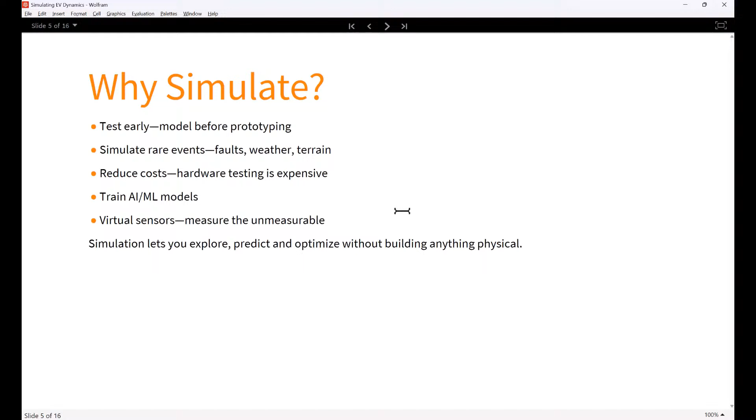With that in mind, let's jump into our EV model and look at the simulation results. Let's open up the model in System Modeler.

For those of you who are new to it, this is the System Modeler's modeling interface. You can build models visually using drag and drop from the built-in Modelica library. This library includes hundreds of components from domains like electrical, mechanical, and thermal systems.

Throughout this presentation, we will look at several of these components more closely and see how they connect to simulate electric vehicle behavior.

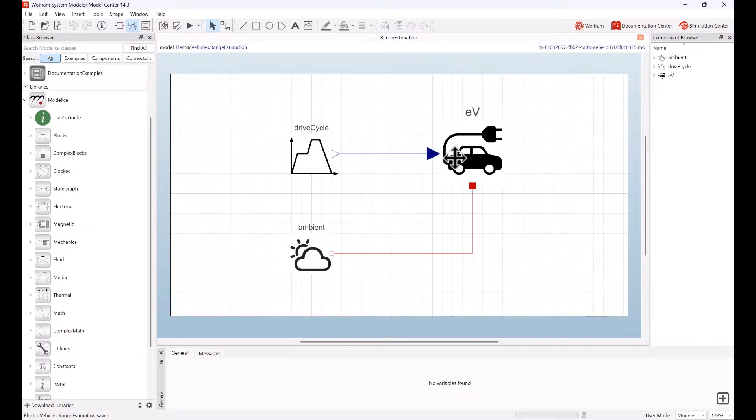Here you can see the top level EV model. The EV is connected to a velocity profile representing how the vehicle moves, and to an ambient component with a temperature input. These components are hierarchically structured, meaning each block contains subcomponents, which you can explore by double-clicking.

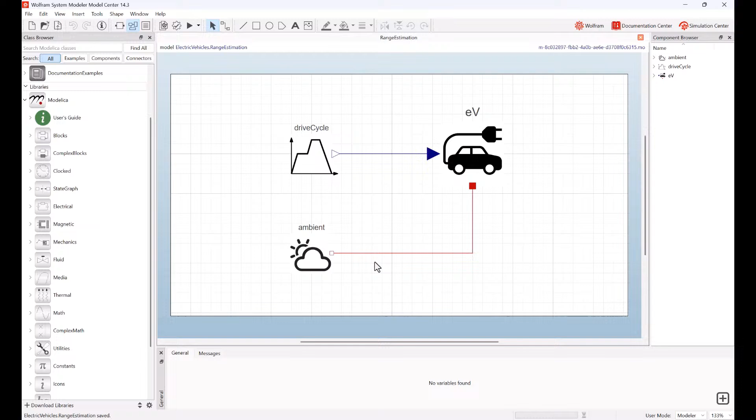Let's zoom in on the EV block. Inside, we see a detailed view of the EV architecture: motor, gearbox, controller, inverter, battery, and thermal systems.

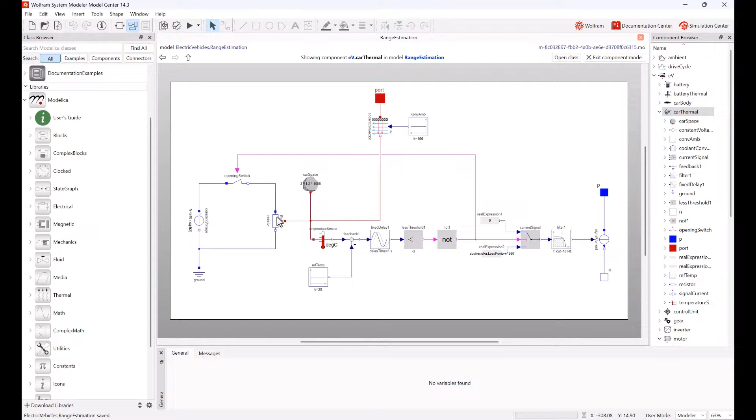You can continue drilling down into any component and even switch to text view to inspect or modify the underlying equations.

For example, in a resistor block, you will see Ohm's law implemented explicitly with voltage and current relationships.

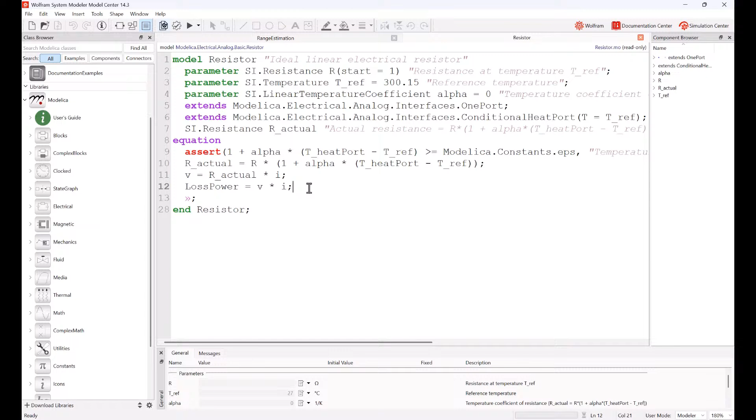You are not limited to built-in components either. You can define your own custom models from first principles or experimental data.

Let's return to the top level and now explore each of the major components one by one. Let's now walk through the major components of the EV model.

We start with a battery, which acts as the energy source. In our case, it provides a DC voltage of around 350 volts. That DC voltage needs to be converted into AC before it can power the AC motor. This is done by the inverter, which sits between the battery and the motor.

The motor produces torque, but at a very high rotational speed, often around 20,000 rpm. To match the wheel speed, this needs to be reduced, typically down to about 2000 rpm, and this is done using a fixed gear reduction stage.

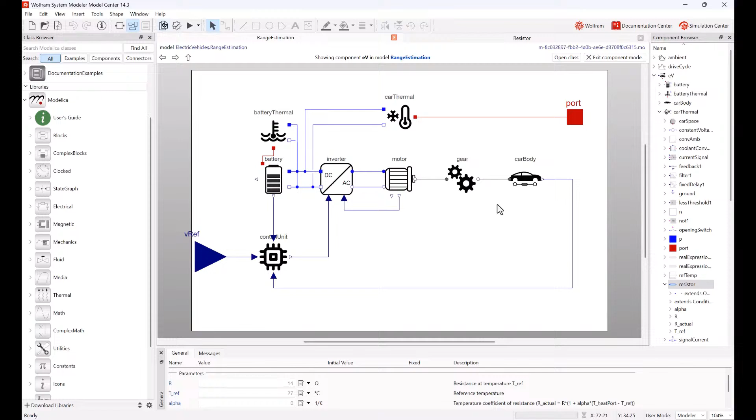From there, power flows into the car body model. This component accounts for all the external forces acting on the vehicle, including aerodynamic drag, rolling resistance, and gradient forces.

There is also a control unit which monitors vehicle speed and regulates current supplied to the motor to achieve the desired driving profile.

Finally, we include thermal components, one for the battery and one for the car, to simulate how heat builds up or is dissipated during operation.

Of course, in a full vehicle model, there are many other components such as DC-DC converters, auxiliary batteries, and accessory systems. But for this presentation, we will focus on the core powertrain and thermal systems.

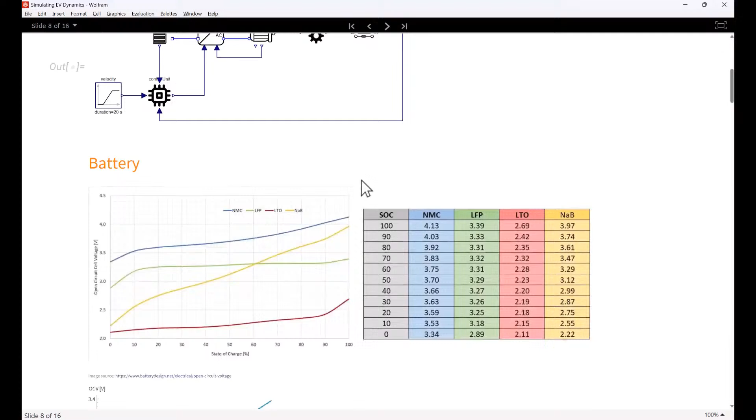Let's take a closer look at the battery component, which plays a central role in EV performance. There are different types of battery chemistries used today, such as LFP, NMC, and LTO. Each chemistry has its own characteristics, and one of the most important is the open circuit voltage versus state of charge, or SOC, curve. In the chart shown here, you can see how the voltage changes as the battery discharges.

NMC cells deliver the highest voltage, around 4 volts at full charge. LTO cells deliver lower voltage, around 2.5 volts. LFP, though not the highest in voltage, has a nearly flat OCV curve, which means the open circuit voltage stays stable across a wide SOC range. This stability is one reason why LFP has become widely adopted in many EV platforms.

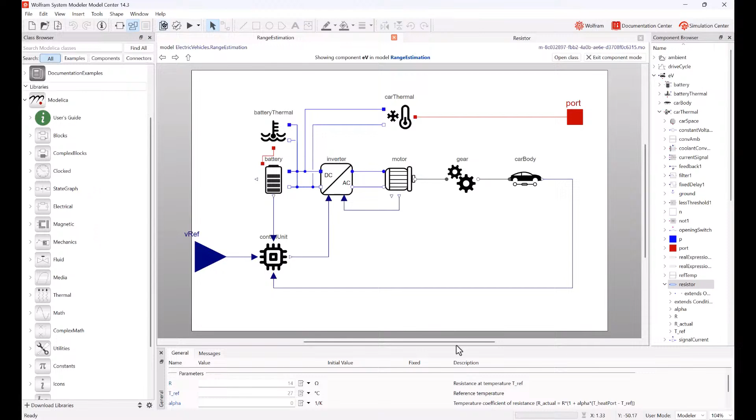Now, this data is for a single cell. In a real battery pack, however, cells are arranged in series and parallel to reach the desired voltage and current capacities. Let's get back to System Modeler. In our battery model, we can define these parameters: number of cells in series to get the total voltage, and number of cells in parallel to get the total current capability.

For the cells, we can also provide the internal resistance, nominal charge, and define the OCV curve itself.

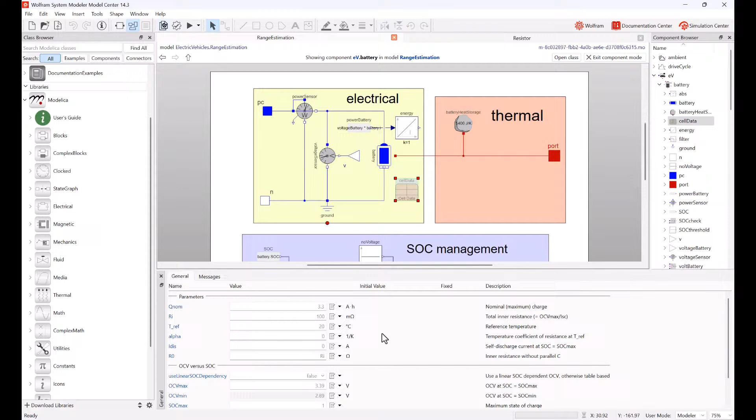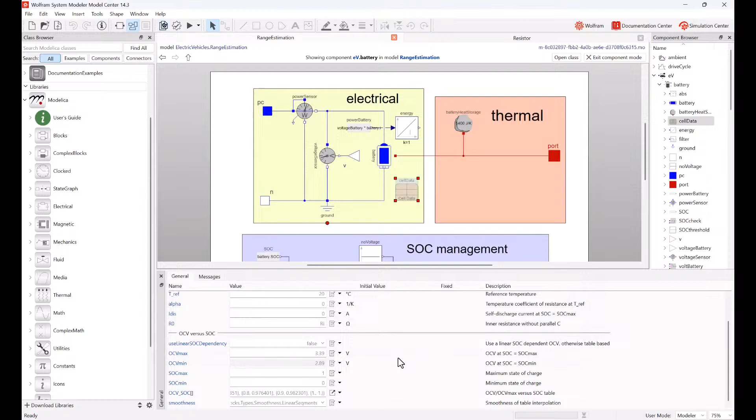The model also includes the electrical dynamics of the cell. Internally, each cell is modeled with a primary series resistance and one or more RC circuits to represent the transient behaviors like hysteresis.

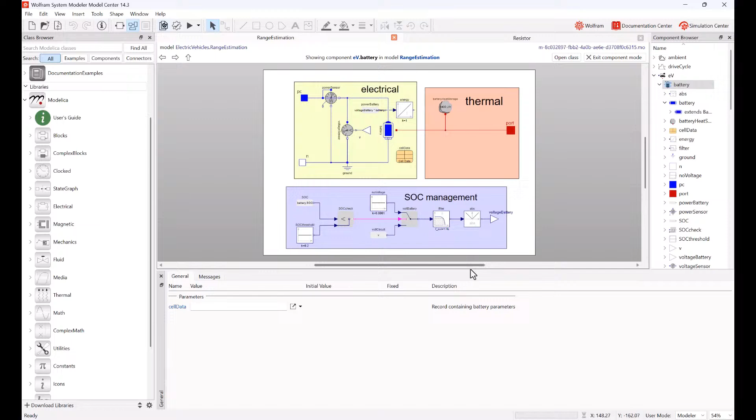There is also a heat port built into the battery model. This port gathers all the thermal losses caused by the internal resistances. The heat is passed on to a thermal capacitor, which is a lumped model representing thermal mass. Its capacity is calculated using the formula mass times specific heat capacity.

This thermal capacitor can be connected to a cooling or heating circuit, for example a refrigerant loop, to simulate active thermal management.

Lastly, a note on connections in System Modeler. You will see red and blue lines connecting components. These aren't just input and output signal wires. They represent energy carrying domains like electrical and thermal connections.

So this approach ensures that the conservation laws like energy and mass balance are automatically enforced and that connections stay consistent within the physical domains. You cannot directly connect an electrical wire to a thermal capacitor.

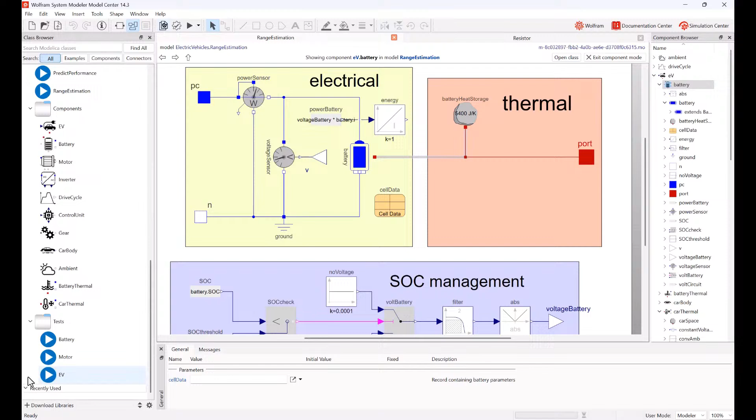Let's now simulate a simple battery test scenario. In this model, we draw a constant current of 100 amperes from the battery pack, which is a typical discharge profile for a sustained load.

As expected, you can see the voltage output starting at around 370 volts and gradually decreasing over time. This follows the OCV versus SOC curve we discussed earlier. As the state of charge drops, so does the voltage.

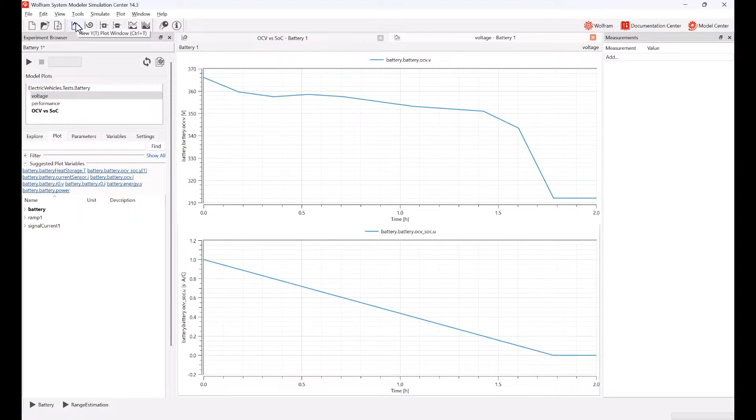Of course, in a real system, thermal management would prevent this. But this test shows why modeling thermal behavior is essential and why cooling systems are not optional in high power applications like EVs. Without proper heat extraction, the battery can quickly enter unsafe operating conditions, affecting not just efficiency but also safety and lifespan.

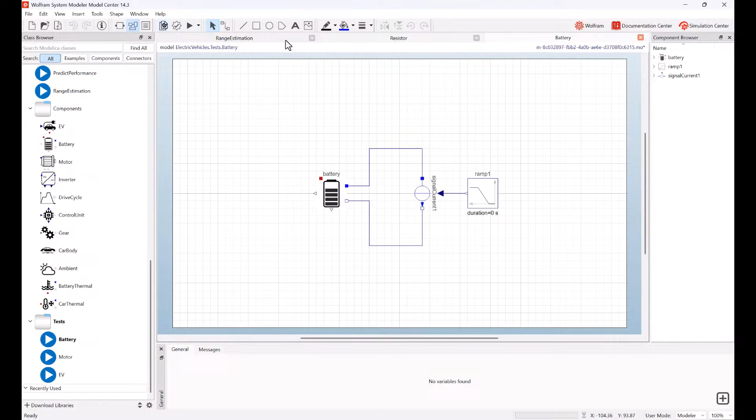Electric vehicles can use a variety of motor types, but the most commonly used in modern designs is a three-phase AC permanent magnet synchronous motor, or PMSM. These motors are popular due to their high efficiency, power density, and good performance over a wide speed range.

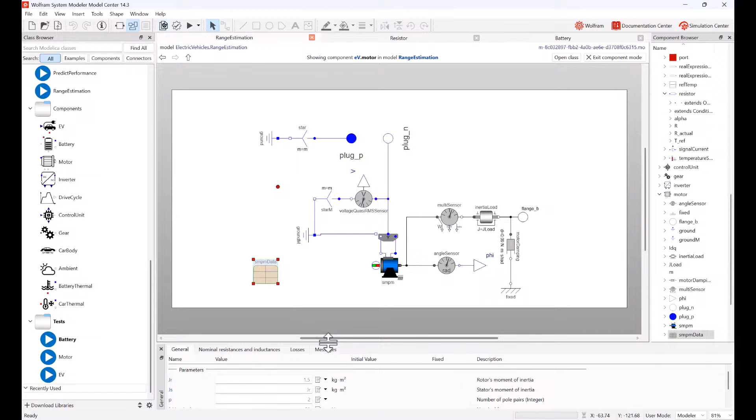In our model, I have used the three-phase permanent magnet synchronous machine component from the Modelica library. This component is based on physical equations and allows you to specify key parameters such as stator resistances and inductances, permanent magnet flux linkages, torque constants, and mechanical losses.

One useful feature of this model is that it is bidirectional. It can operate both as a motor and a generator depending on the power flow direction. That is essential for simulating regenerative braking scenarios, where the motor recovers energy and sends it back to the battery.

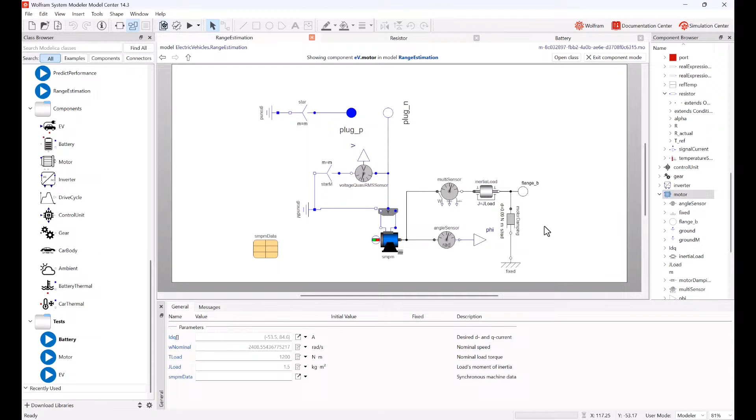On the mechanical side, the motor is connected to a shaft model which includes a rotational inertia to simulate the mass of the rotating components, and a damping element to represent friction at the shaft or bearing level. Now let's simulate a simple driving scenario.

The vehicle accelerates from 20 to 100 km per hour. As expected, the motor power and torque increase during acceleration. Once the target speed is reached and the vehicle cruises, the required power and torque drop and stabilize. This reflects typical EV behavior, where high torque is required at low speeds for acceleration and lower power is needed once cruising.

Now let's take a look at the car body component, which brings together the mechanical forces acting on the vehicle. This component accounts for four main forces: traction force, generated at the wheels by the motor via the drivetrain; gravitational force, due to the weight of the vehicle when it moves along a slope or gradient; rolling resistance, caused by the deformation from friction between the tires and the road surface; and aerodynamic drag, the resistance from air which increases with speed.

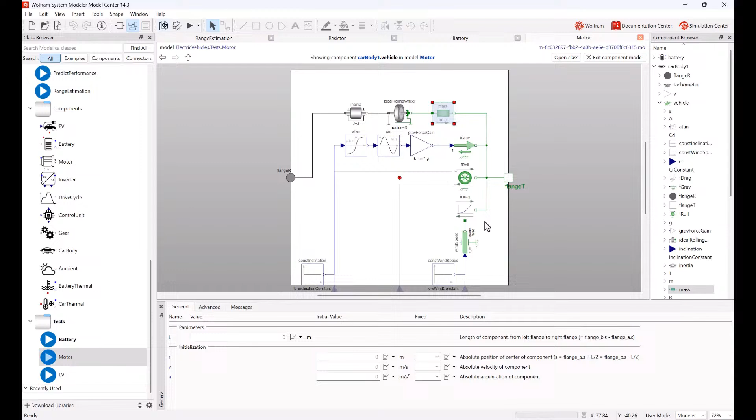In our test simulation, the vehicle moves over a constant incline while accelerating from 0 to 100 km per hour. Let's simulate and see the results. The rolling resistance and gradient force remain constant since they depend on vehicle weight and slope. However, aerodynamic drag increases quadratically with velocity, meaning it becomes a dominant factor at higher speeds.

To move the vehicle, the traction force generated by the motor must overcome all of these resistance forces. In addition, it must supply extra force for acceleration, especially in the early phase of motion. This component gives us insight into how external forces interact with the drivetrain and how energy demand changes as the vehicle moves.

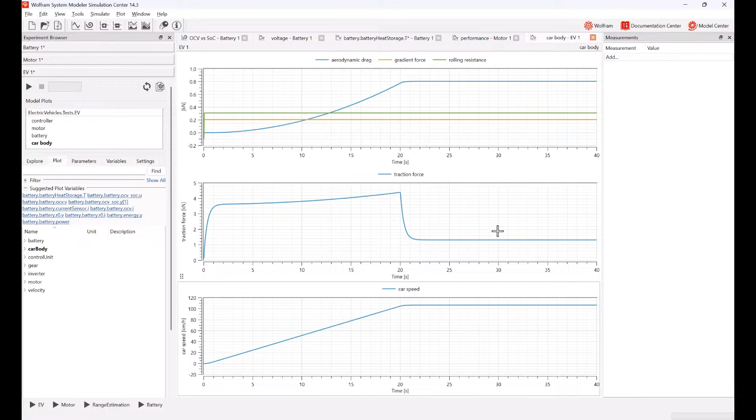So far, we have seen how I modeled the key components of the electric vehicle, from the battery and motor to the car body. One of the strengths of this approach is flexibility. Depending on your modeling objective, you can increase or reduce the level of fidelity. For example, you can use a detailed electrochemical battery model or simpler data-driven interpolation curves. For our test case, the current level of fidelity gives us the right balance between accuracy and simulation speed.

Now let's return to the original question. How far can this vehicle drive on a single charge, and how do external conditions affect that range? To keep things simple, we will assume the car drives at a constant speed of 110 km per hour on a flat road. Under standard conditions, the vehicle travels about 400 km on a full charge.

If there is a headwind of 20 km per hour, the range drops to around 360 km. But if the outside temperature falls to -10 degrees centigrade, the range drops further to just 300 kilometers. That's a 25% reduction in range from 400 to 300 km caused by cold weather. This drop is primarily due to increased energy usage for cabin heating. We will look at this thermal effect more closely in a later slide.

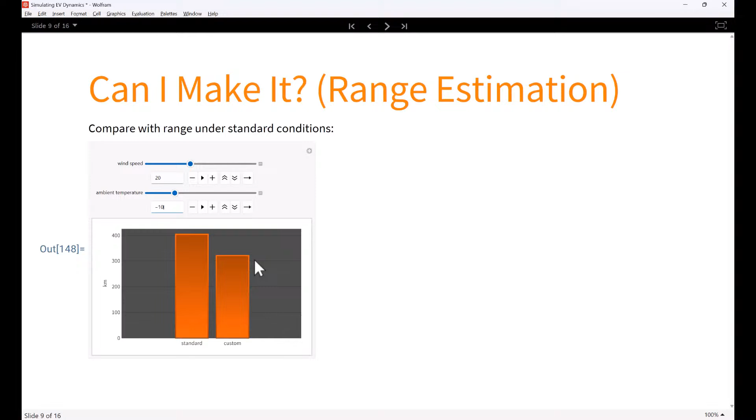The next question we asked was, how does city driving compare to highway driving in terms of range? In city driving, we typically deal with traffic, lower speed limits, and frequent stop and go movement. This results in regular acceleration and braking. For this simulation, we used a driving cycle where the vehicle speed fluctuates between 30 and 70 km per hour, mimicking typical urban traffic.

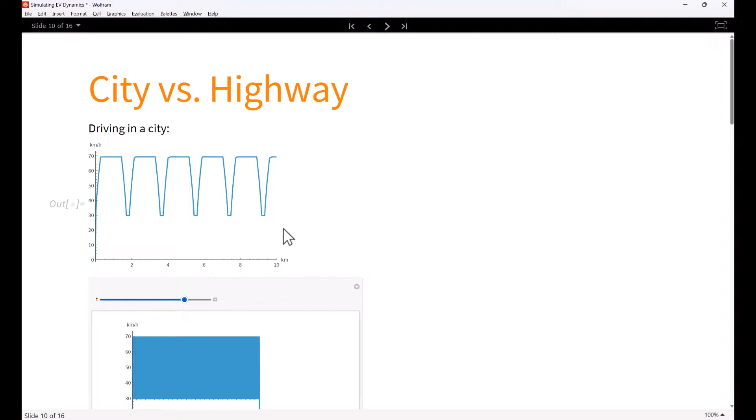We run the simulation until the battery reaches a minimum SOC threshold of 20% to simulate practical usage. Surprisingly, the vehicle travels up to 500 kilometers in this city scenario, significantly more than the 400 kilometers under highway conditions.

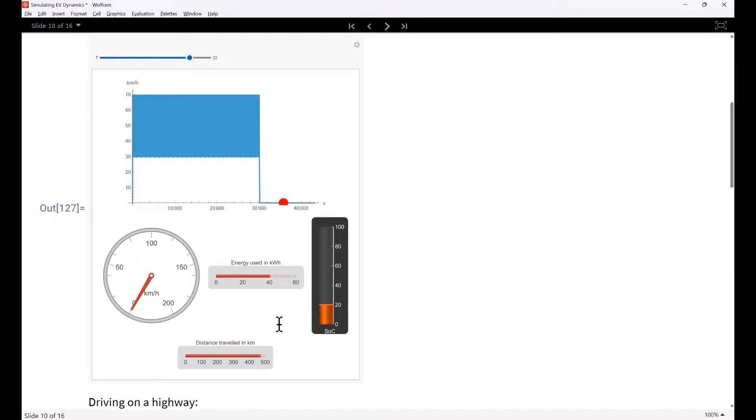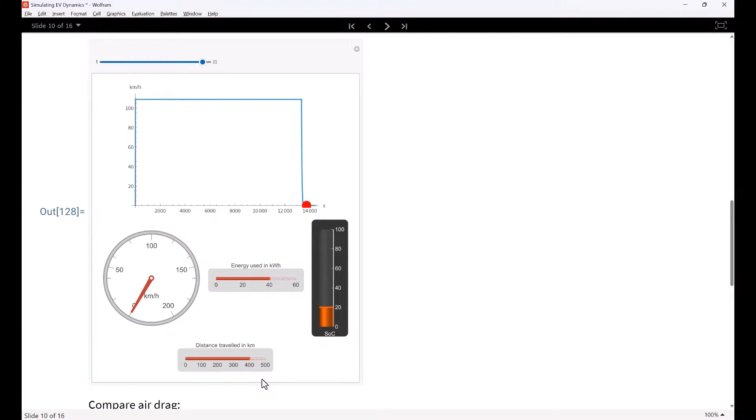So, what contributes to this increased range? First, aerodynamic drag is much lower at city speeds. It drops from around 800 newtons on the highway to about 400 newtons in city driving. Since drag increases with the square of speed, this has a major impact on energy consumption.

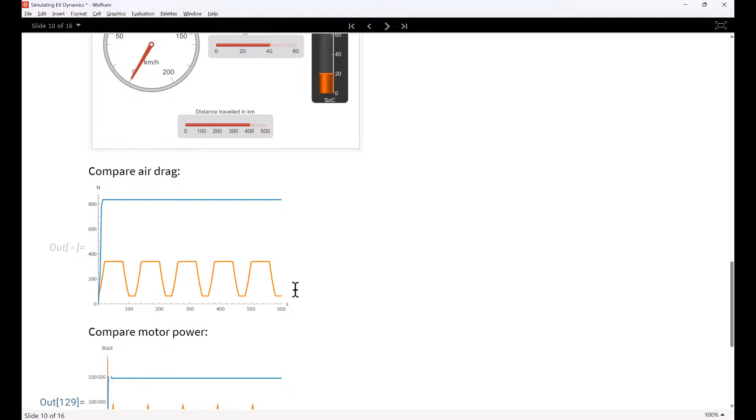Second, the motor acts as a generator during braking, recovering energy. In our simulation, it generates peaks of around 8 kilowatts during regenerative braking events. And third, battery cooling demand is lower in city driving. At high speeds, the battery generates more heat and needs active cooling. At lower speeds, thermal losses are reduced, meaning less energy is spent on keeping the battery within safe operating temperature. Together, these effects combine to make city driving more energy efficient, even though it may seem counterintuitive.

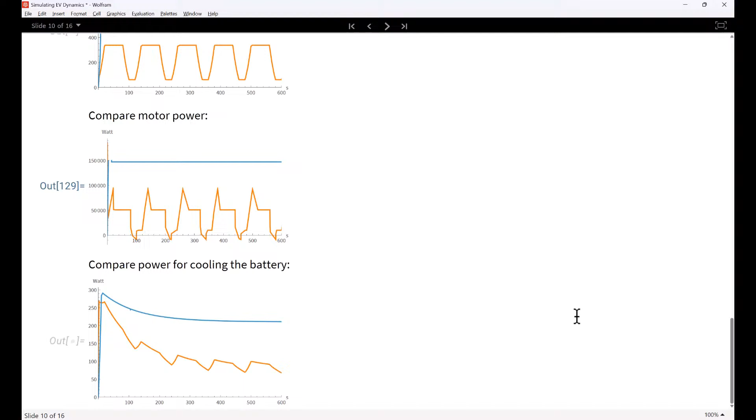Now, let's look at the impact of terrain on energy consumption and range. Let's say you're driving uphill on a road with a constant slope of 7 degrees, a typical mountain ascent. In our simulation, after driving for 2 hours, the vehicle ends up with around 40% state of charge, compared to about 60% state of charge if it were driving the same speed on flat terrain. That 20% difference highlights the additional energy required to overcome gravitational resistance when climbing.

However, there is an important consideration here, something that's easy to miss in range estimates. If you're driving back downhill, the situation reverses. The motor can act as a generator, recovering some of the energy that was spent climbing. This is an example of regenerative braking, where potential energy from elevation is converted back into electrical energy and sent to the battery, rather than being lost as heat. So, while uphill driving reduces range, terrain isn't always a one-way loss. In looped routes or round trips, net elevation change matters more than the presence of hills alone.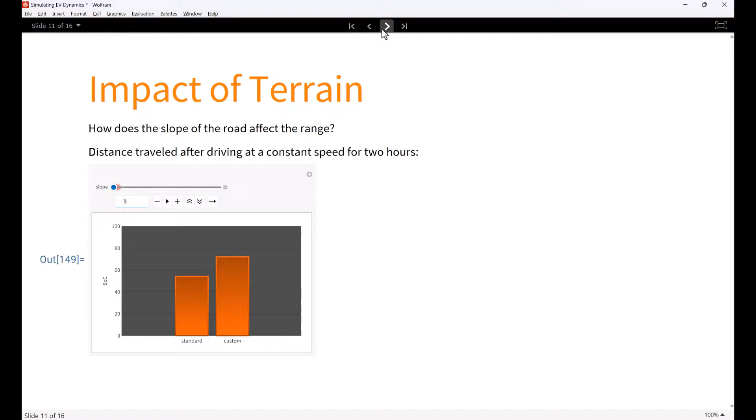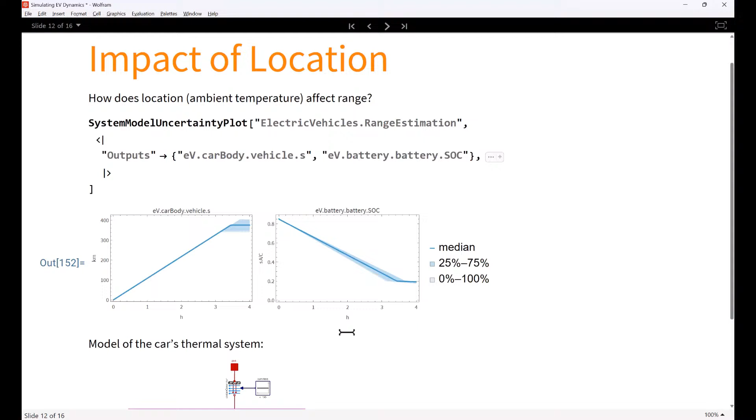Let's return to the topic of temperature, because where you live can make a significant difference in vehicle performance. This uncertainty plot shows how range varies with ambient temperature. If you live in a region where winter temperatures drop to about minus 10 degrees centigrade and summer temperatures reach plus 30 degrees centigrade, you can expect the driving range to vary from around 400 kilometers down to around 300 kilometers, a 25% reduction.

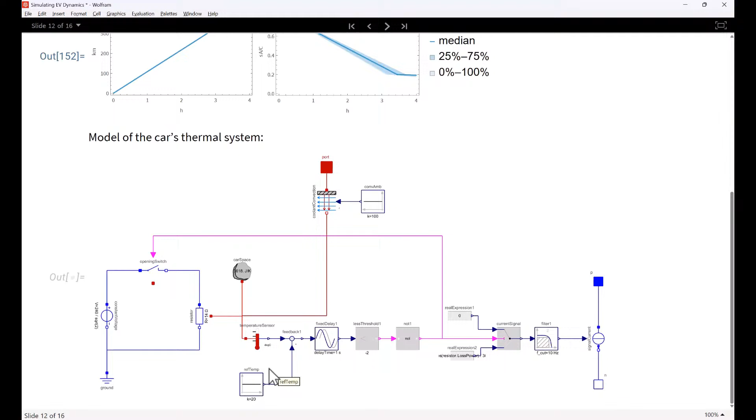The main contributor to this drop isn't just battery chemistry, it's space heating. In cold weather, energy is diverted from the battery to heat the cabin. In our model, we use an electric resistance heater which turns on when the cabin temperature drops below a set comfort level. This adds a continuous energy load during winter driving. So it's not just cold batteries, it's also the need to keep passengers warm that reduces range in cold climates.

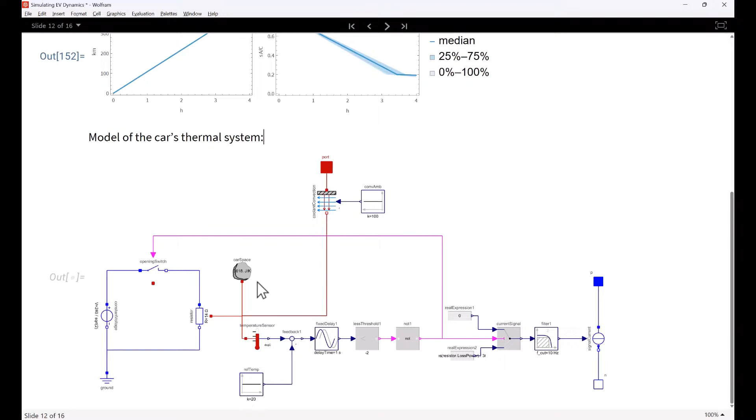In modern EVs, space heating is often handled more efficiently using heat pumps instead of simple resistive heaters. Heat pumps work by transferring heat from other parts of the system, including the drivetrain or ambient air, and can be significantly more energy efficient.

One interesting opportunity, especially in colder climates, is to reuse the heat generated by the battery itself. In System Modeler, this is easy to explore. You can tap into the battery's heat port and redirect that thermal energy to the cabin space using a thermal connection.

Or you can go a step further and model a full fluid coupled heat pump circuit. I will leave that as an open exercise. Try building this in System Modeler and see how much range you could save by reusing the waste heat.

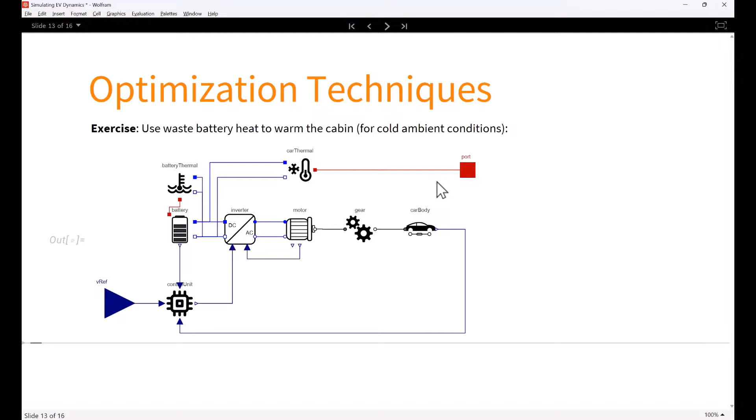And finally, to summarize: simulate before you build. It helps identify design issues early before committing to hardware. Terrain, temperature, and traffic conditions all have a significant impact on range and performance. And finally, virtual models let us measure what's otherwise unmeasurable, from internal thermal losses to hidden energy flows.

With that, thank you for listening to this presentation, and now let's open up for Q&A.

Yes, hi Leo. Hello. So yes, Rob's like... while preparing for Q&A, I think we have prepared some polls. So let's start the polls and see how attentive people have been towards the presentation. In the meanwhile, Leo, have you prepared some questions for me based on your review of the presentation?

Yeah, I was thinking a few. I was curious about the gear component of the EV. How does it look like? I have more experience with the electrical part, not the mechanical. You're the electrical guy, but in my case, the gear model is a very simple model. It's a fixed, ideal gear, so I'm not considering gear losses.

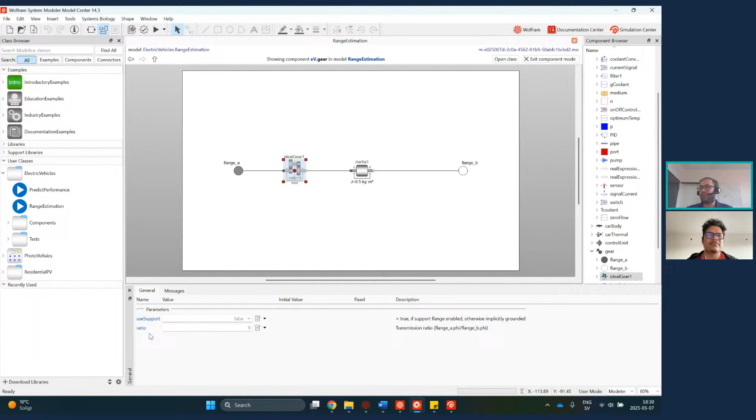So this component could be changed for some kind of automatic shifting gear, right? Yes, yes. Basically, what we have here is the ratio defined as a parameter, and if you want to change things while simulating, you might want to change it as a real input and play with the input on the fly.

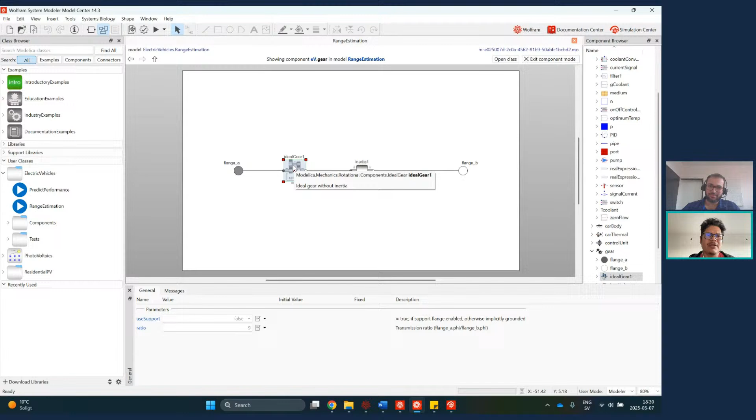That would be a way of making a simplified model of a gearbox. But I have also seen Modelica or System Modeler models where they try to model a full automatic gearbox. I guess it should be possible to plug that in if you wanted a more complex model of the gears, but I guess in this case it's good enough.

For EVs, you don't need that complex gearing because the torque the motor provides is almost constant and highly efficient for a wide speed range. So you don't need to vary the gears that much. But of course, you can have a complete logic behind this, and then you can model that.

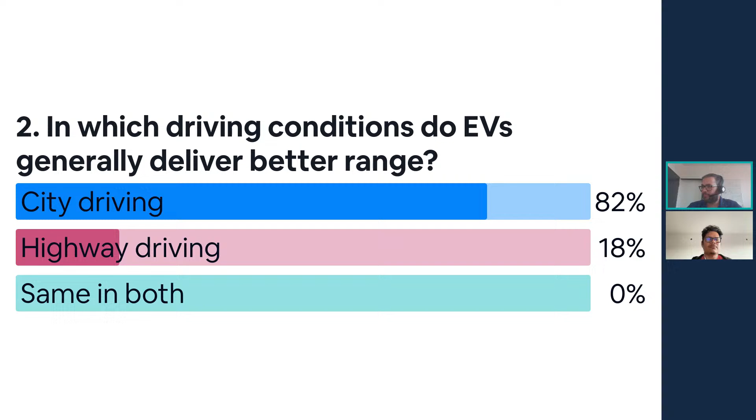In which driving conditions do EVs generally deliver better range? It's city driving, and the reason is primarily the regenerative braking. So the first one is the right answer. Rob, if you can show the third poll.

Which type of motor is most commonly used in modern electric vehicles? It is permanent magnet synchronous motor. I think when it started it was induction motor, but currently it's primarily permanent magnet synchronous motor that's being used.

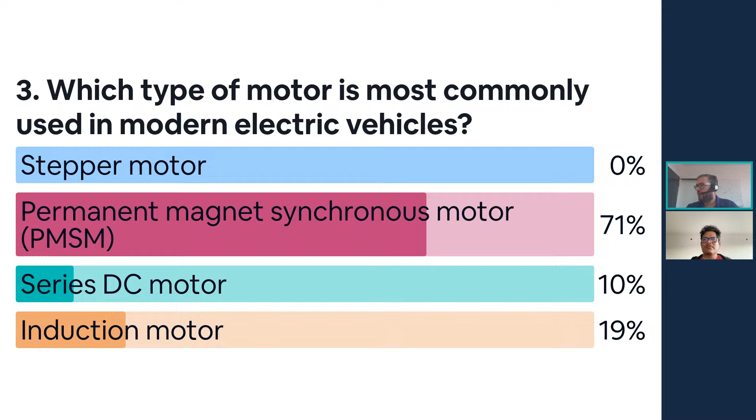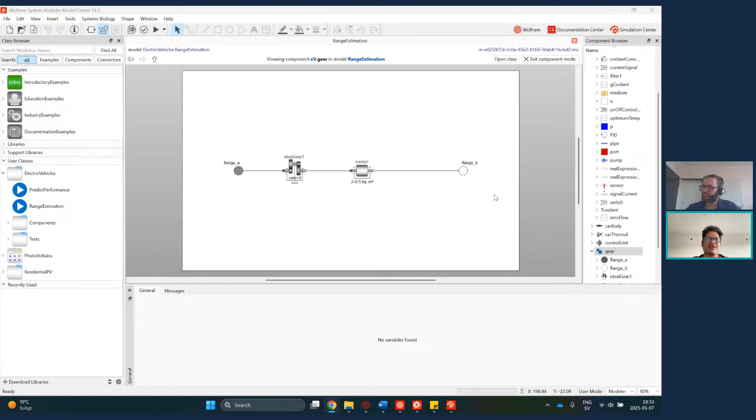Leo, do you have any other questions? More than a question, it was a comment. I don't know if you're aware there are communities of people doing DIY, creating their own electric cars, so you don't need to buy them from a company. What they do is create or manufacture their own battery packs, replace the motor with batteries and electrical parts. So this kind of modeling will be very useful for that community because it allows them to calculate how much battery they need to carry.

One very much related field where we've helped some of our customers is drone modeling, because in drones the voltage profile from the battery is also very important. If the voltage changes, then the force generated by the propeller changes as well. It's very similar, of course it does not have this AC motor, it has a brushless DC motor, but the concept is similar.

I was thinking, I don't know if you have this in the model, but it's surely possible or very easy to do - for example, if you want to add more cells to your battery, how much weight is that going to add to your car, and also you should be able to calculate the range.

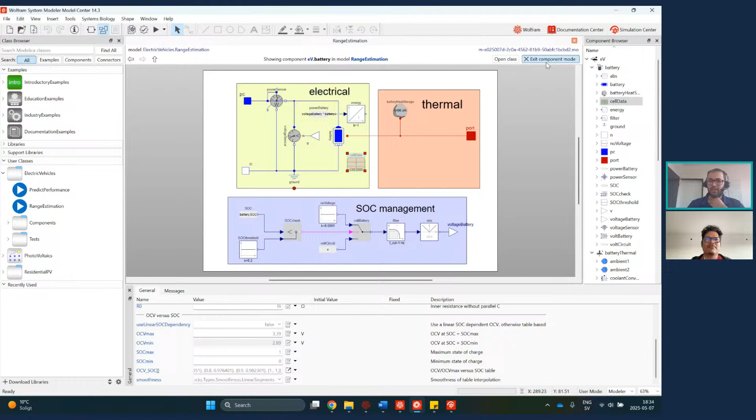Right, so in the battery model, one thing we do not have by default is the weight of the battery. The way I've defined it is, if I go into the car body, we have this vehicle component, and there we have the dead weight of the car, which I think takes into account the battery weight as well. But if you want to test, say you have 5 passengers or want more luggage, you can manipulate this mass parameter and check how it would affect things.

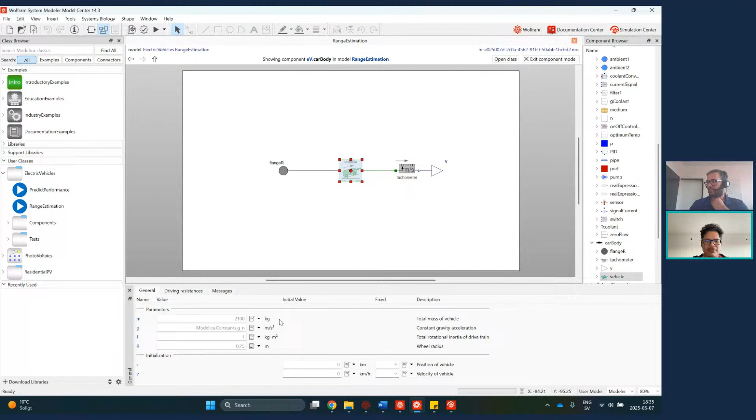Now that you mentioned the battery model, did you also consider thermal management? Oh yeah, oh yeah. That is something I did not cover yet.

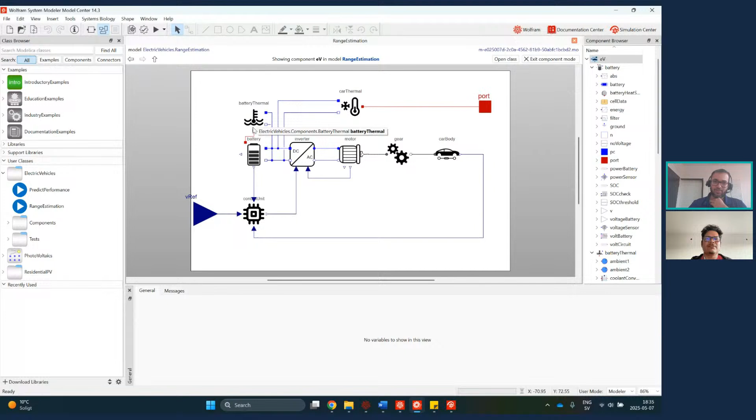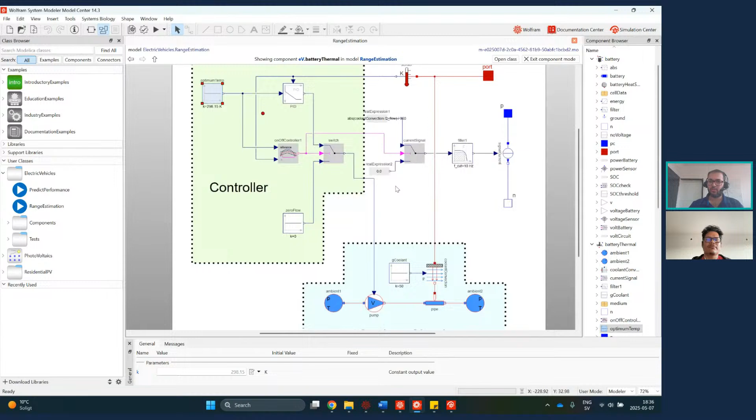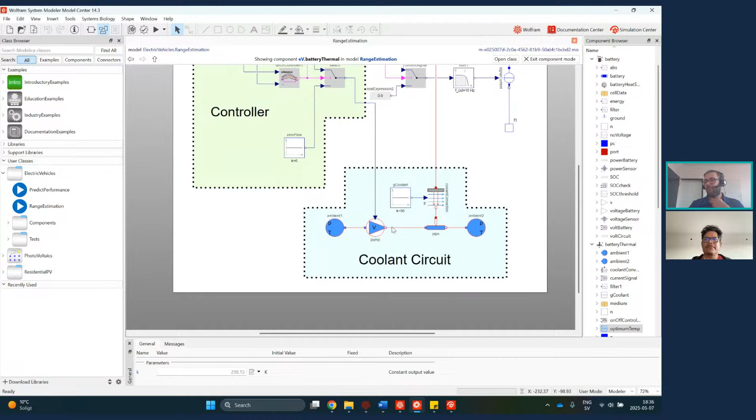In the battery model, in a real EV you have a very complicated circuit, but in my case, just to represent the scenario, let me show it. I take the heat input, convert it into a real signal because the heat port I have cannot directly be used with my controller circuit. Here I have a simple PID controller which tries to set the battery temperature to 25 degrees centigrade. From there, I have a very minimal cooling circuit, basically a fluid at constant temperature going from left to right. What this PID does is manipulate the mass flow rate of the fluid passing through the pump so it can absorb all the heat. In a real circuit you'd have a more detailed coolant circuit with pumps, valves, and different configurations, but for this scenario I just showed it's possible to combine the control logic with a coolant circuit.

So this is more like the radiator of gasoline cars, where there's a place where the liquid is cooled, and then it flows into the battery - there's a heat exchange happening, right? Yes, yes.

Let's take some questions, Leo. One question was - how do we get access to the models that I showed here?

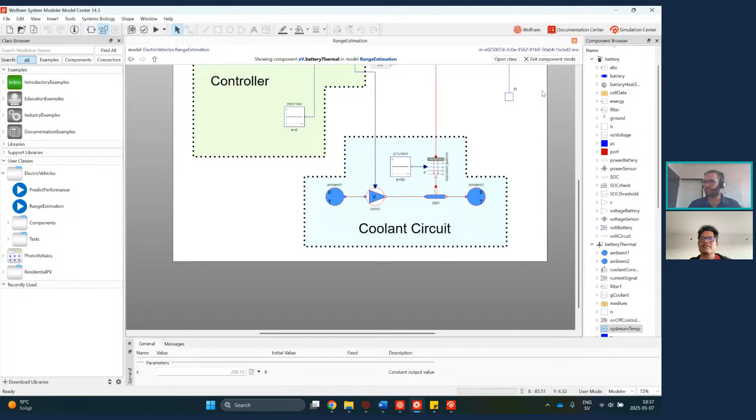If you have the same version of System Modeler and Mathematica, version 14.3, then it should work automatically. If you have Mathematica 14.3 and run the initialization command, the model should automatically load in System Modeler 14.3, you don't need to do anything. But if you have a different version of System Modeler and Mathematica, you would need the model file. Rob, maybe after this I can send you the model, and you can send it via mail to all the participants later on. Yes, you can.

So the next question is from John: can I give a quick brief overview of the key vehicle parameters?

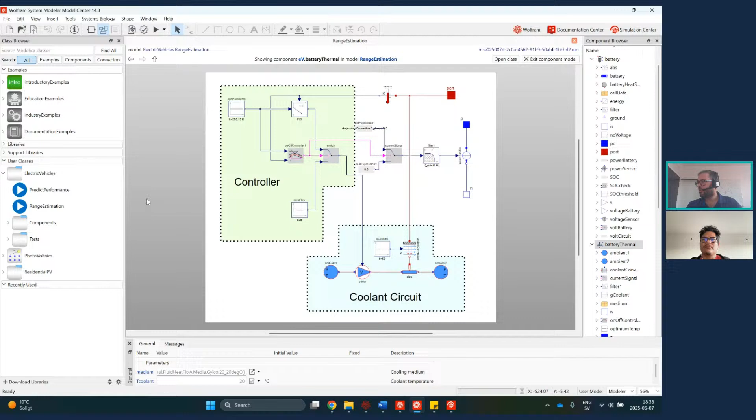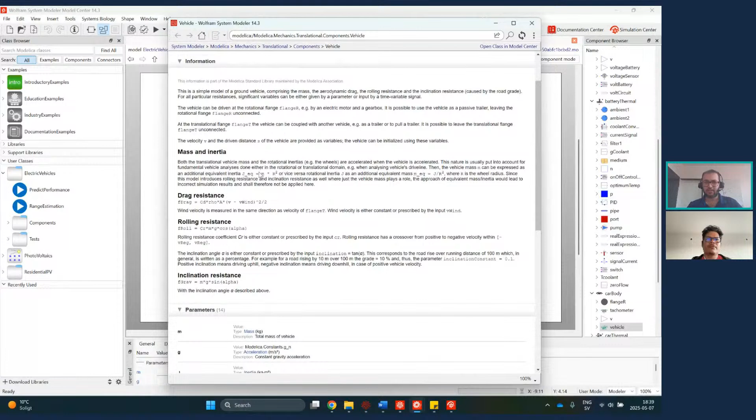In my car body, for the vehicle component that I have used, if I open the documentation, I would right click and open the documentation. Here you could see how the vehicle model is modeled, like how the different resistances are calculated.

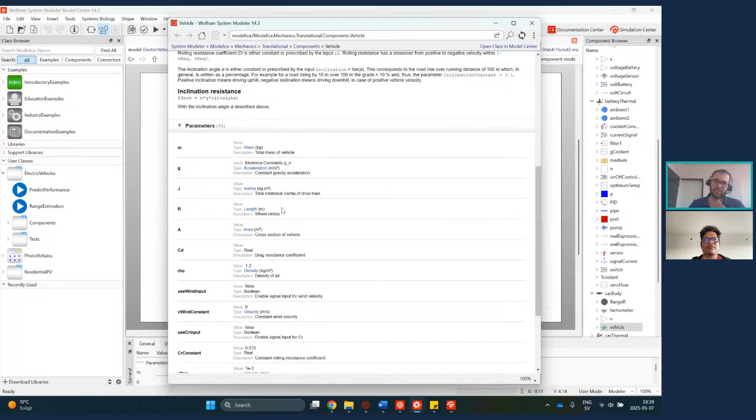And here you could see the different parameters that you can set. You can set the total mass of the vehicle, the wheel radius, the frontal cross-sectional area to compute the air drag, the rolling resistance coefficient, and other things.

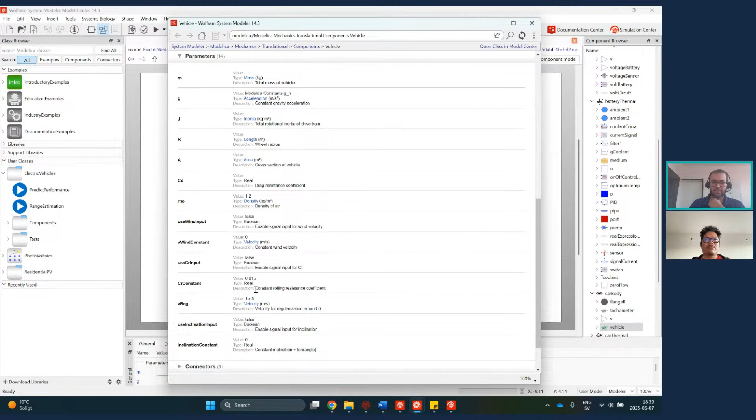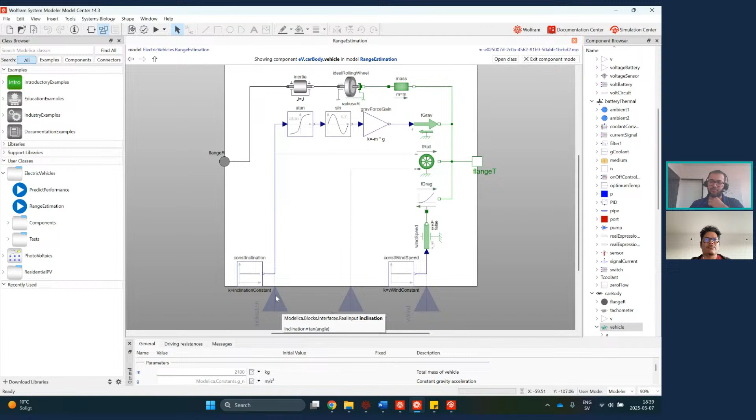In our example, we had a constant inclination, but you also have the flexibility to add a variable inclination, like you would have in a real drive. The inclination would change as you move, and you can feed the data to this model, and it will compute the traction forces accordingly. So you can define the variable wind speed as you move along, as well as the inclination, as real inputs to this vehicle model.

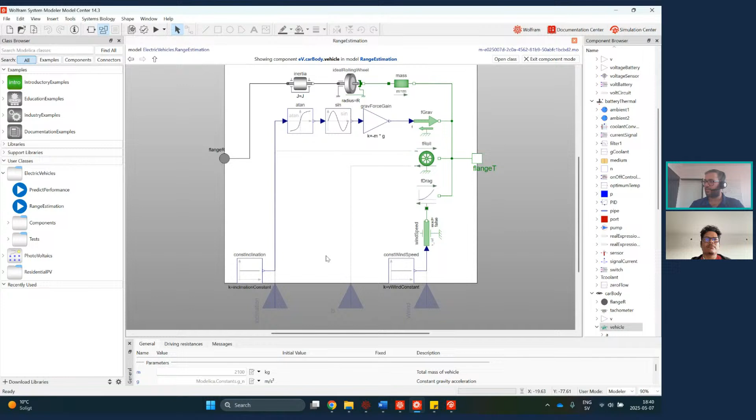Yes, right, Leo. Are there any other questions, Leo, that you had?

No, I was just wondering, let's say that I want to install some solar cells on the roof of my house. I guess it should be possible to do the calculations, right? And should be simple to do the calculations and simulation to see how much energy I will need to charge the battery.

Yes. So during the Wolfram Technology Conference, and this presentation is also on YouTube, there is a third party library called the Photovoltaics Library that has the solar cell components. Let me bring it up.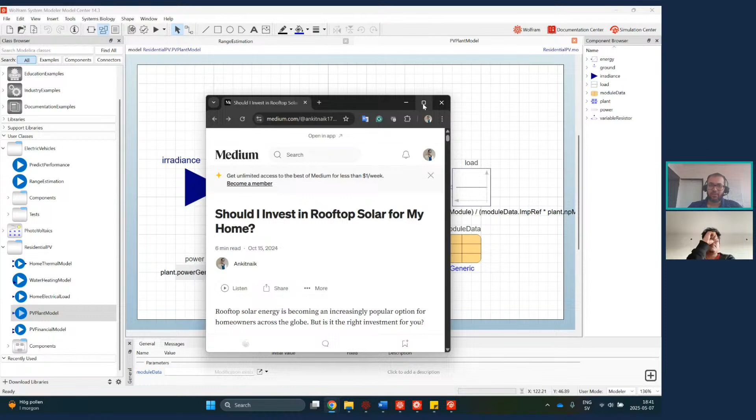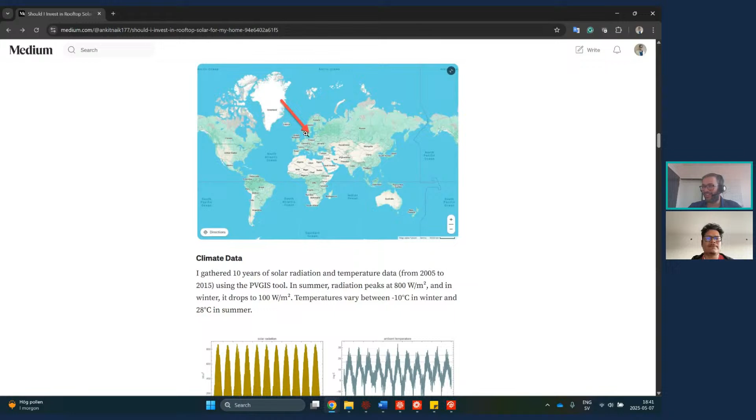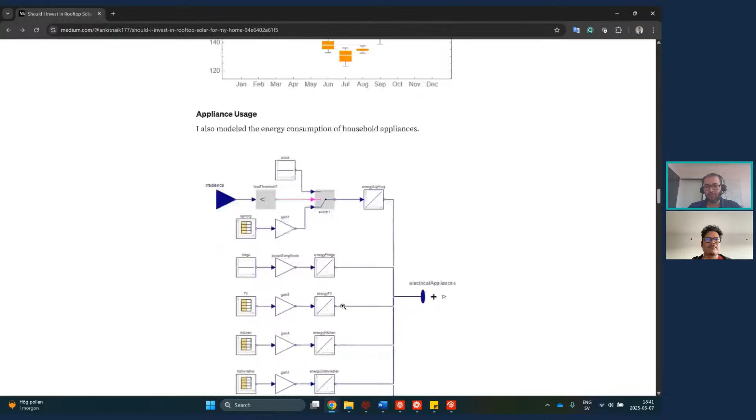And I wrote an article about it as well, where we showcased, for given location, like we are located in Linköping in Sweden, what is the solar profile that we have here, and based on that we compute the energy consumption throughout the year.

And then in this presentation, I had also shown how to calculate the power that you can obtain from this solar panel for a 50 square meter house.

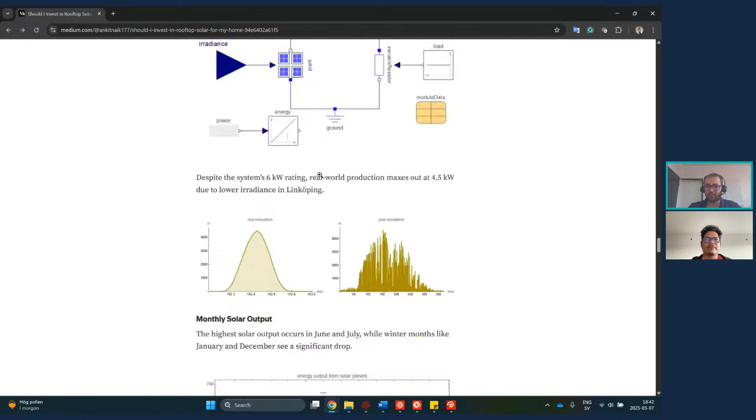And here you could see the yearly simulation, and then here was the monthly energy output that we get from the solar panels. From here you could couple it, or use this presentation to see if it is favorable, and in which months you could use your solar power to power your EV and such.

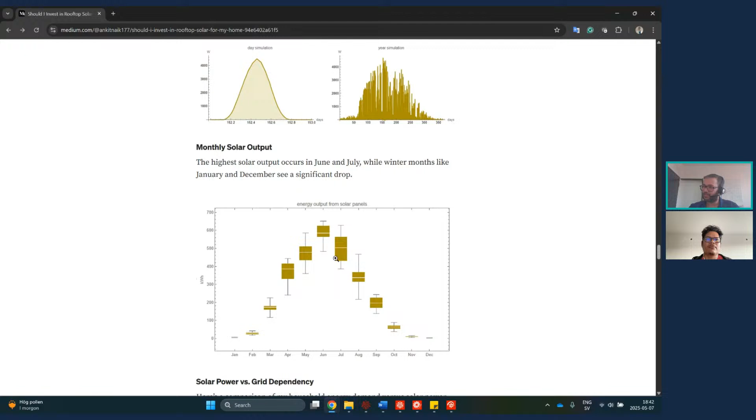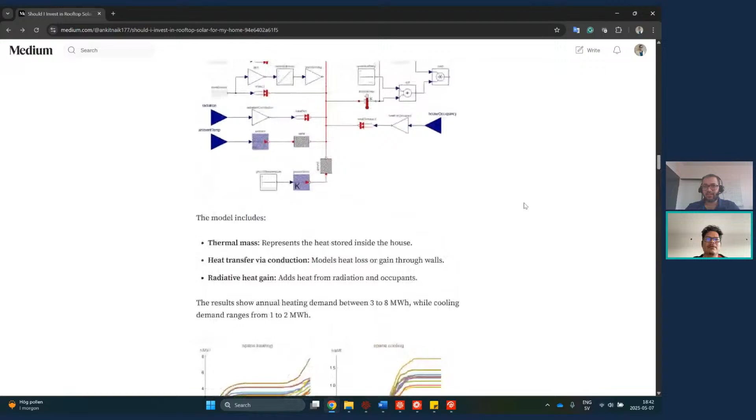So one question is, in this case, you use real data, right? Yes, in this case, there is something called PVGIS, a third party database. From there I obtained the solar radiation and ambient temperature data, and then I got the power from my solar plant. But this is a side topic from what we are discussing today.

But yes, you could model this, and if you're interested, if you search for rooftop solar with System Modeler, you can find it on YouTube as well, on our Wolfram R&D channel. So it's hosted there.

And just one more, going back to the thermal management, I guess it should be possible as well to combine this model or to obtain the data to be used, for example, in finite element simulations, for example for the radiator. So what are the applications like?

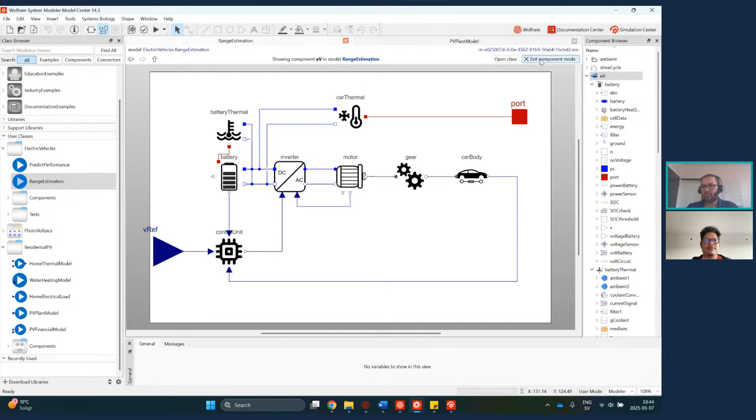Okay, one thing is, you are trying to design a new drone or new EV, and you want to size the different components. You have the specification from different suppliers, and based on those specifications, you want to see how the final output would be. That is one use case.

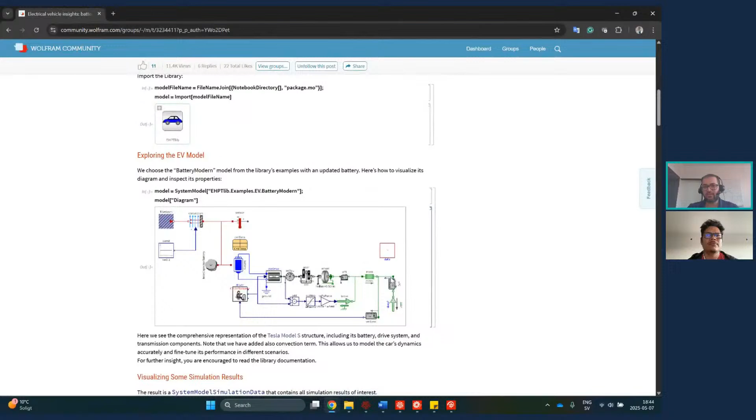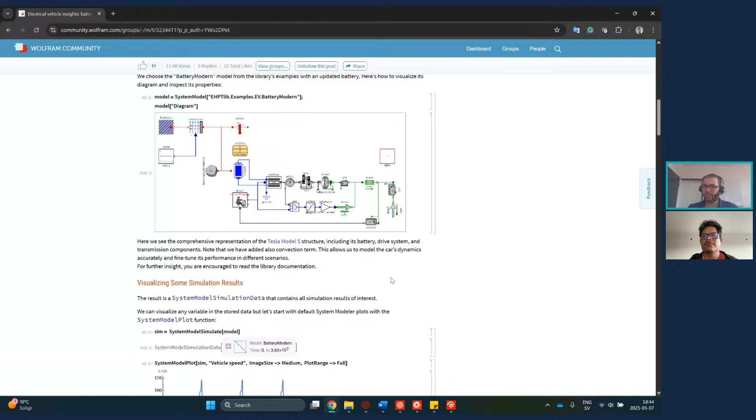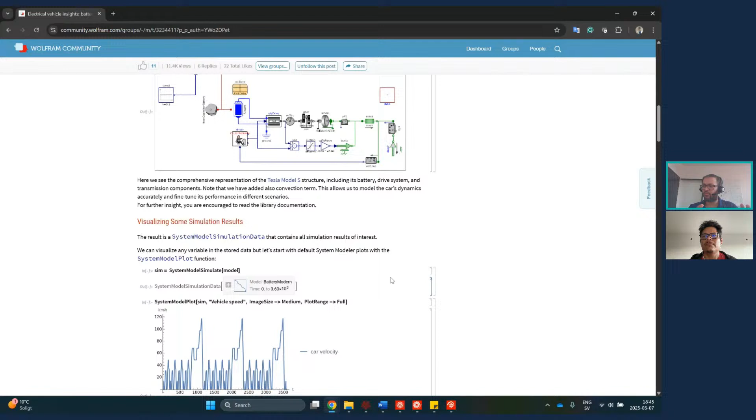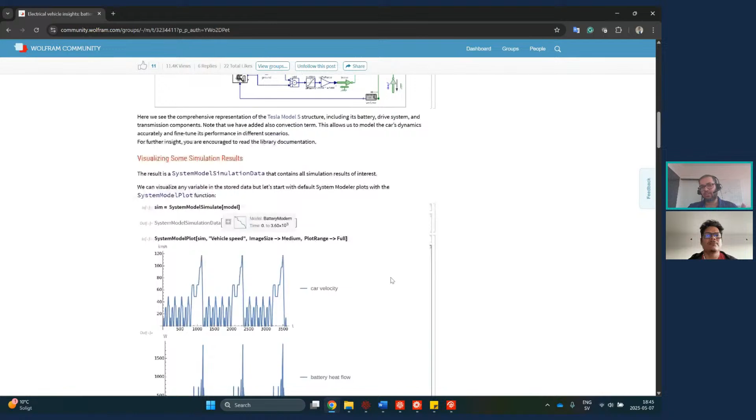The other use case, as my colleague Vedat had also shown before, is you can use these models to get boundary conditions. So if you have a FEM model of a battery pack, and you want to input the inlet current that needs to be fed into your battery pack, or the inlet coolant that needs to be fed to the battery pack, and how the temperature profile across the battery pack would behave spatially, you need a FEM model, and in that case you can use the system model to generate these boundary conditions, feed those inputs to your FEM model, and then see spatially how the heat is distributed across the 3D space.

So yeah, once you have the model, you can do all those sorts of interesting things.

Right, and another question that I see here is regarding whether the files are compatible with version 14.2, because I guess you have 14.2.1.

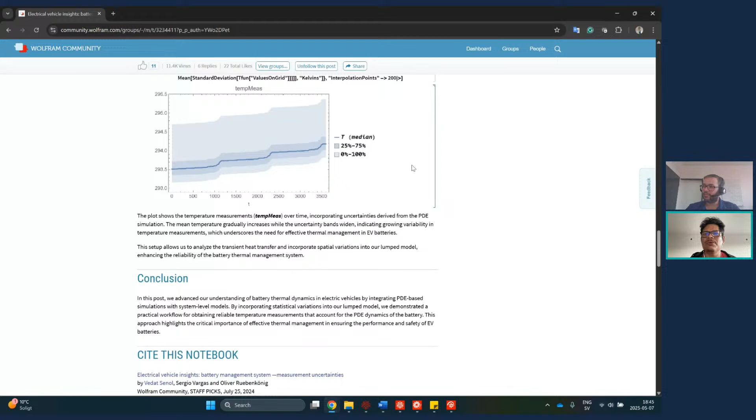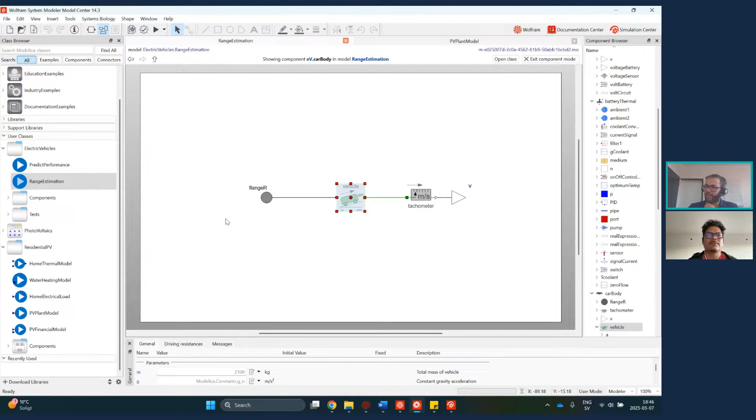Yes, I will have to check, because in car body we have this. I've used Modelica components from the Modelica library, but I think in 14.2 or 14.3, Leo, correct me if I'm wrong, we had some change in the Modelica standard library version. I have to double check if we ship with the version that has all these components I'm using. Probably they should work because from point two to point two point one it should be a minimal change, so most things should work fine since those are mainly bug releases.

Then the question is, if I have Mathematica 14.1, does it have the System Modeler? I think since version 12, Mathematica comes with the System Modeler kernel, so you should be able to run the models in the notebook. But as we were discussing with Leo, some older versions of Mathematica and System Modeler might not have the updated Modelica library in them, so some of the components I'm using might be missing.

One thing that should also be possible, Leo, is that if you upload the presentation notebook to the Wolfram Cloud, you should be able to evaluate it there. It should work there because it uses the recent version. I'm not sure about the dynamics, but I think it should work there if you want to play around with the manipulates.

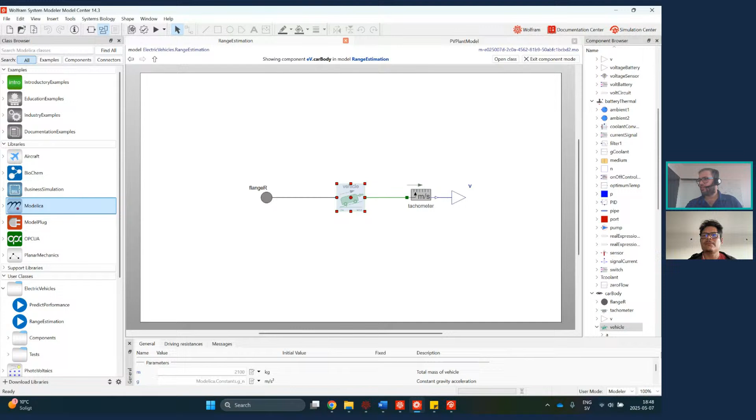Before that, I also wanted to highlight that we have an upcoming study group on electric vehicle dynamics. Today was a very brief, general overview so that everyone can understand and get a feel of it. But the study group goes into more detail on this EV modeling part, digging deeper into subparts like battery modeling. We devote an entire hour to battery modeling, and Leo will help with the power electronics part, like how the switching systems in inverters and DC-DC converters work. We'll go into detail there, and hopefully you'll be able to model that as well. We'll also look into different motors, like the brushless DC motor and the permanent magnet synchronous machine, and see in detail how those work.

Finally, we'll have a small thermal management section, combining a thermal loop with a fluid loop and trying to see how you can transfer heat from one location to another. If time permits, we'll use a heat pump and try to show how a heat pump works. So if you want to dig deeper into the different components we covered today, you're more than welcome to join this study group, which will be happening from June 23rd onwards.